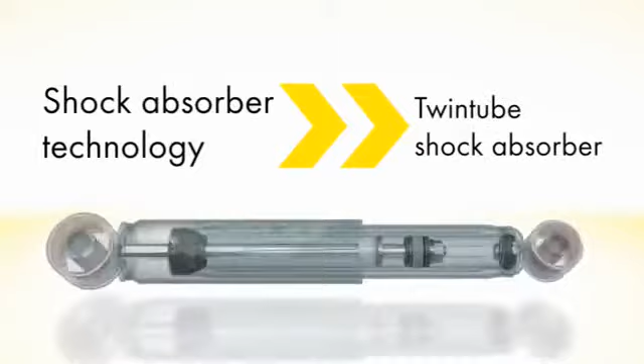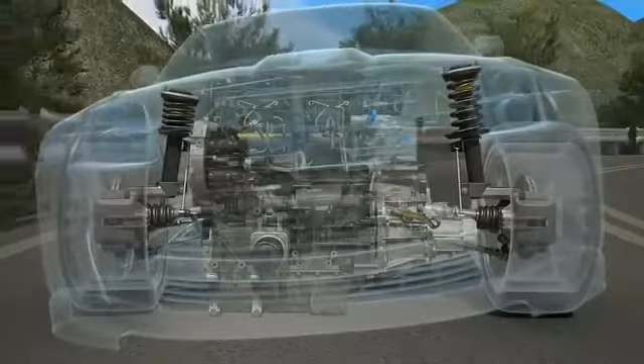The shock absorber is one of the fundamental elements of the vehicle's suspension system. Its function is to stop spring oscillations, providing control, grip, stability and comfort to the occupants of the vehicle.

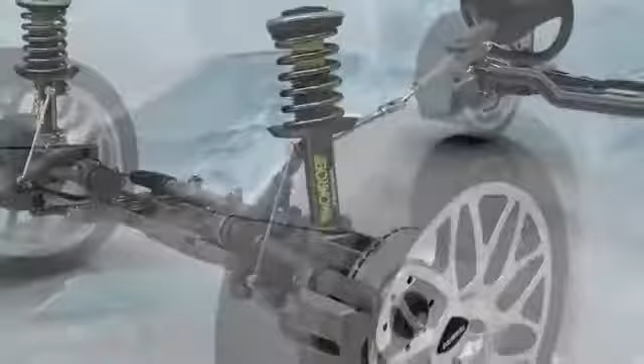Shock absorbers today are hydraulic devices, i.e., they work on the basis of oil flowing through valves, the damping rate of which is sensitive to the speed of the piston. Therefore, the faster it moves, the more resistant the shock absorber is to movement, thus becoming more rigid.

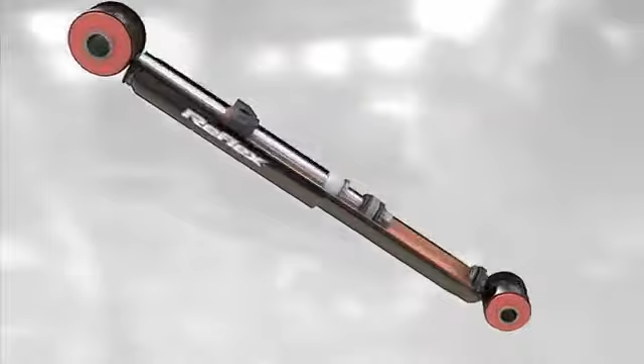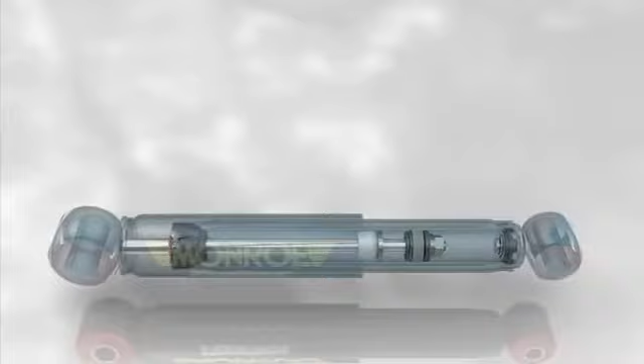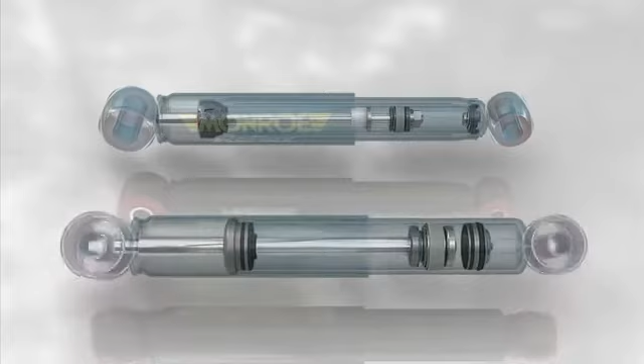The most common type of shock absorber currently used in motor vehicles is the hydraulic telescopic type. Although there are other variants on the market, most units are built with 1 or 2 cylindrical steel tubes with a rod moving up and down inside, which is attached to the vehicle.

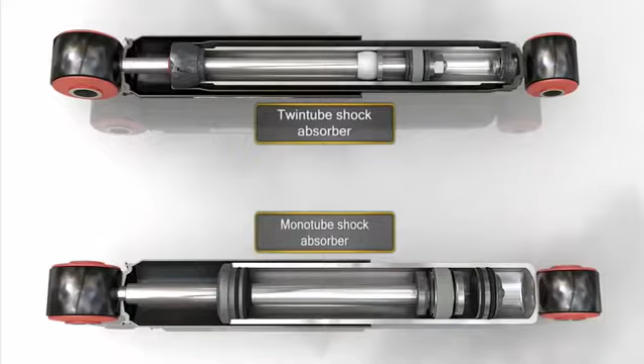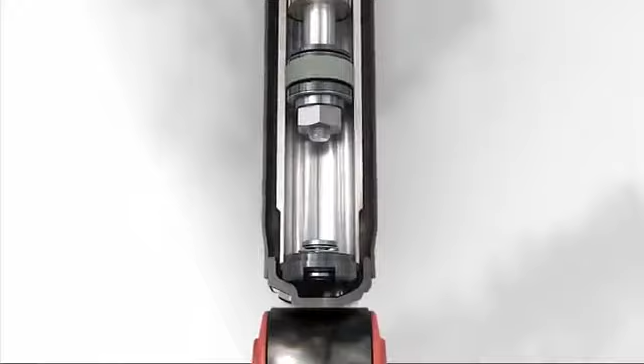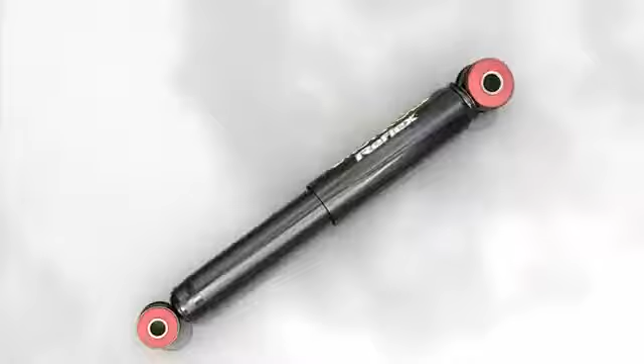The system includes calibrated valves that allow compression and rebound forces to be adjusted by controlling the oil flow through them in different driving situations. Twin-tube shock absorbers, as the name suggests, have a body made of 2 concentric tubes. These tubes create the working chamber and the reserve chamber.

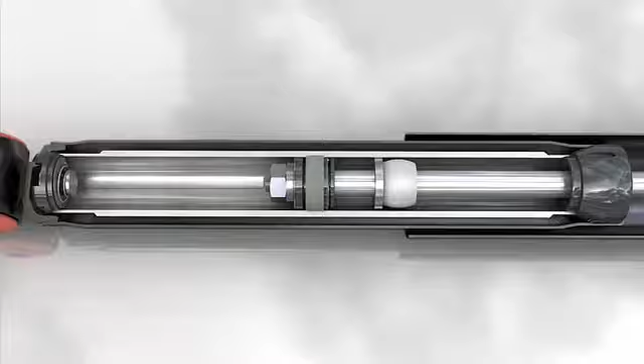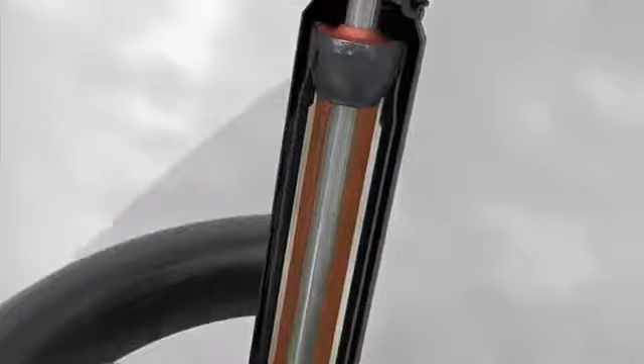For the shock absorber to perform its function properly, the working chamber must be full of oil at all times. Otherwise, the valves will be operating in air, causing them to malfunction. The reserve chamber will always be partially full of oil because its function is to ensure that the working chamber fills with oil, regardless of how compressed the shock absorber is.

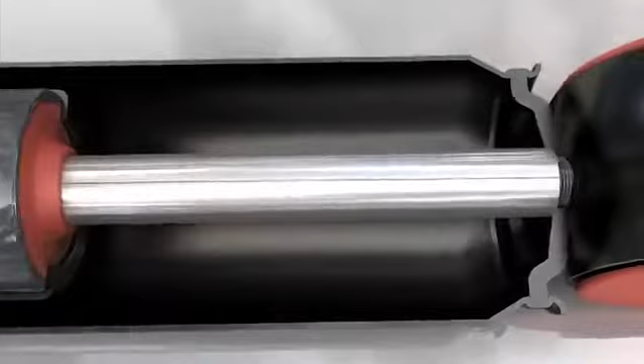Both tubes are separated, and a compression valve is located at the base of the working chamber tube. The standard design of any twin-tube shock absorber also includes a piston rod with a piston valve moving up and down inside an oil-filled cylinder known as the working chamber.

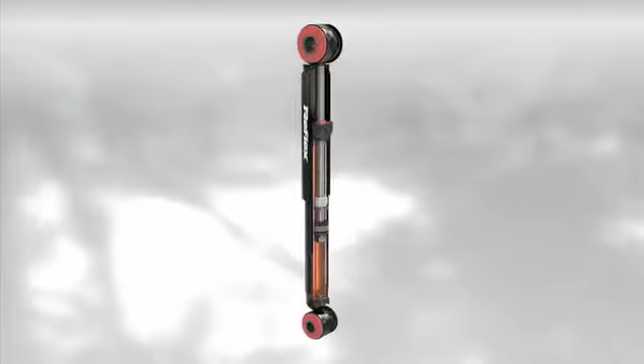This rebound valve comprises 3 types of basic elements that control oil flow. Flexible discs with the bleed perforations required to control force at low piston speed, 0.12 meters per second. The set of flexible discs necessary to control force at medium speed, 0.42 meters per second. And a perforated central cylinder or interface which manages the force when the rod moves at high speed, 0.76 meters per second.

In twin-tube shock absorbers, we also find a compression valve at the base of the working chamber tube. The configuration of this valve is similar to the piston valve, but inverted. It is also smaller in size because its design takes into account the damping force provided by the coil springs during compression and other elastic elements of the suspension system.

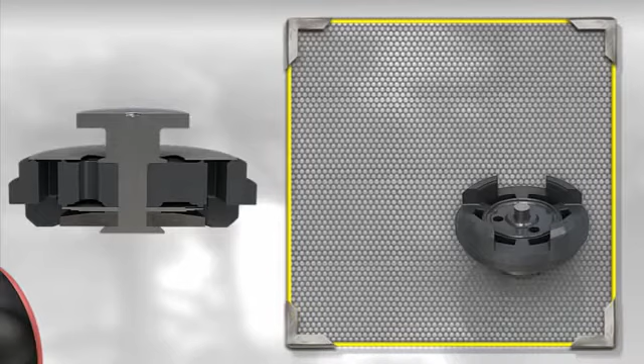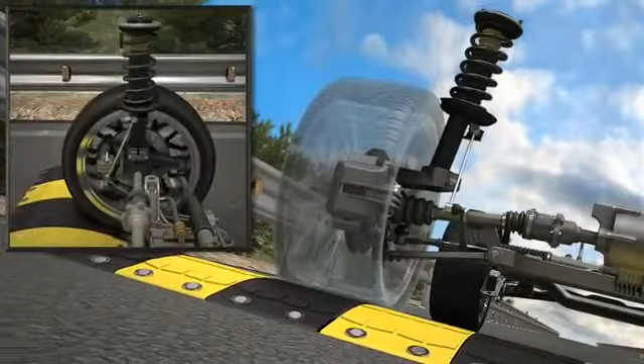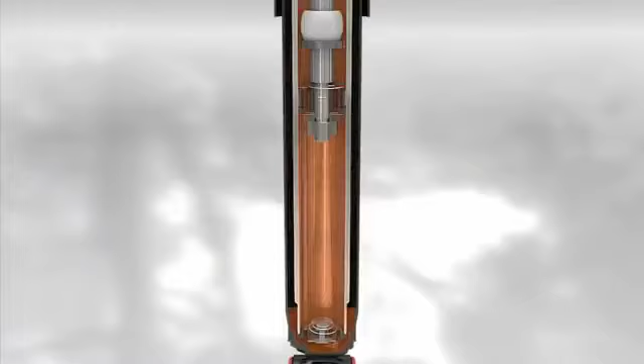When the shock absorber compresses due to uneven ground, the rod enters the working chamber, increasing the pressure of the oil contained internally. During this so-called compression phase, the compression valve controls the resistance of the damper movement, while oil flows almost freely from the bottom of the working chamber to the top through the piston valve. Increased oil pressure in the working chamber causes the compression valve to progressively open, and the excess oil to flow into the reserve tube in a controlled manner.

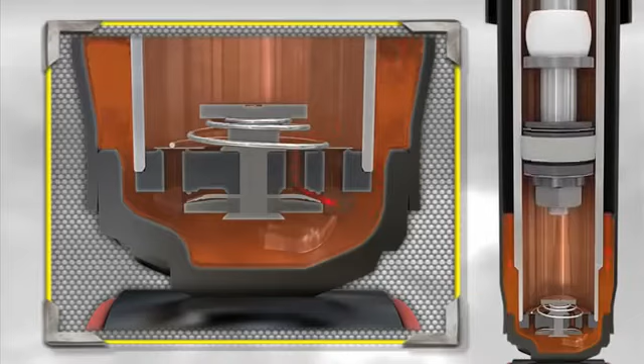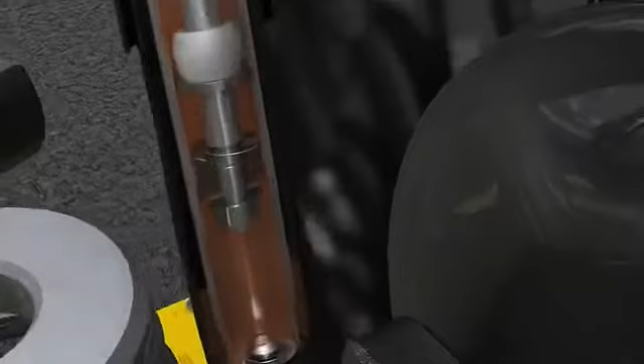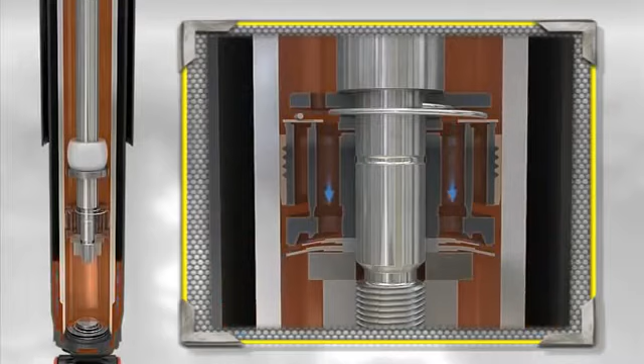During the rebound movement, the piston rod leaves the working chamber in a controlled manner due to the effect of the rebound valve. This movement creates a vacuum, which causes oil suction from the reserve chamber, which is equivalent to the volume of the piston rod having left the working chamber during the rebound movement. Thanks to this effect, the working chamber is constantly full of oil.

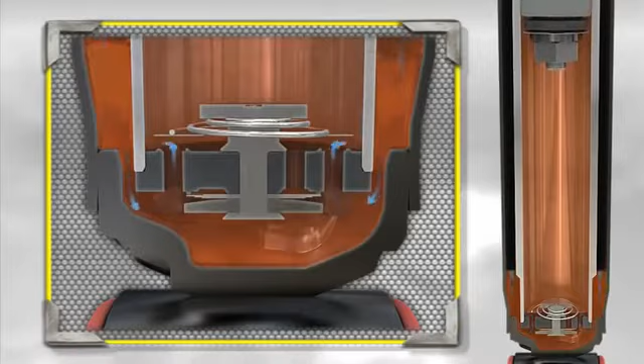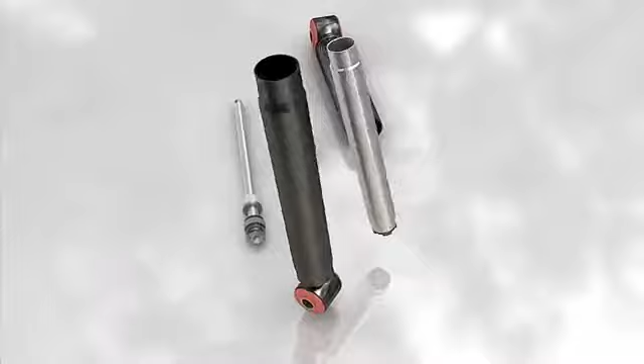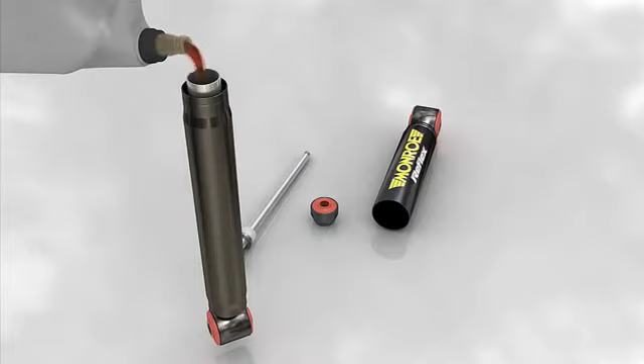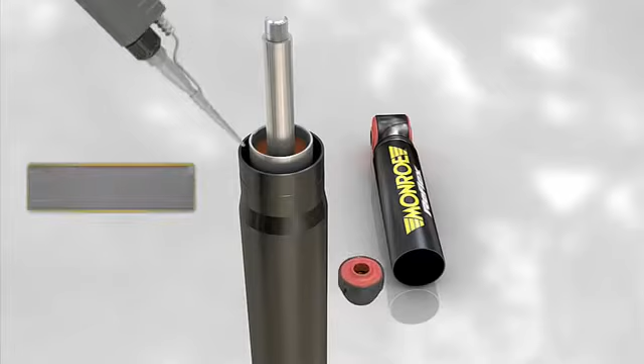In twin-tube shock absorbers, when the reserve chamber ambient air is replaced with compressed nitrogen at low pressure, 2.5 to 8 kilograms per square centimetre, these are called gas-charged shock absorbers, or more correctly, gas twin tubes. This gas charging process is carried out during the manufacturing process. Liquid nitrogen is added to the storage chamber prior to fitment of the oil seals, located at the top of the shock absorber, to prevent leakage.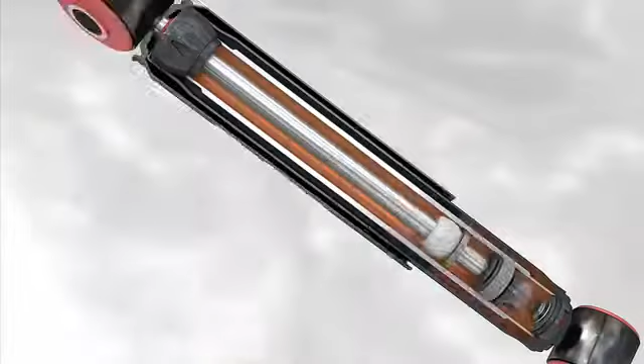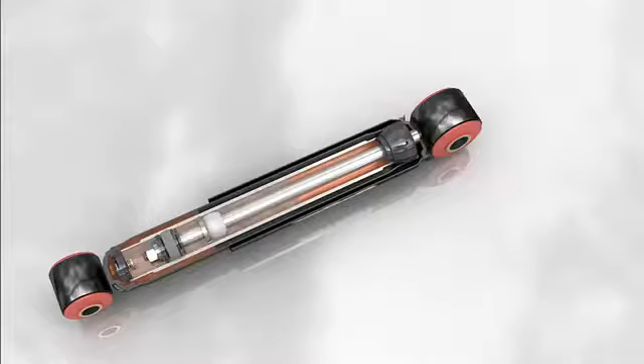The key advantage obtained by adding pressurized gas to the twin-tube shock absorber is that it avoids the phenomenon known as hydraulic fluid aeration or foaming, which appears when air bubbles form in the oil due to excessive pressure changes occurring when the oil flows through the piston valve as it moves up and down at high speed. Aeration causes noise and inconsistent shock absorber performance due to the air flowing through the valves.

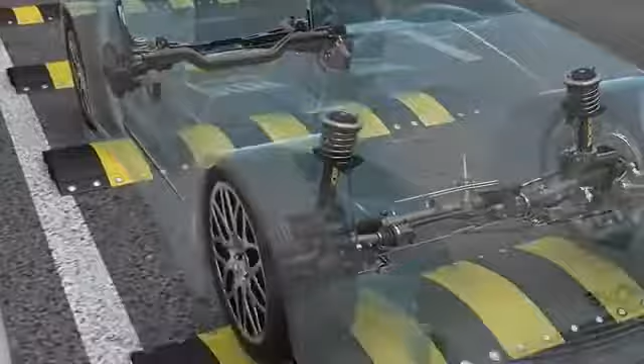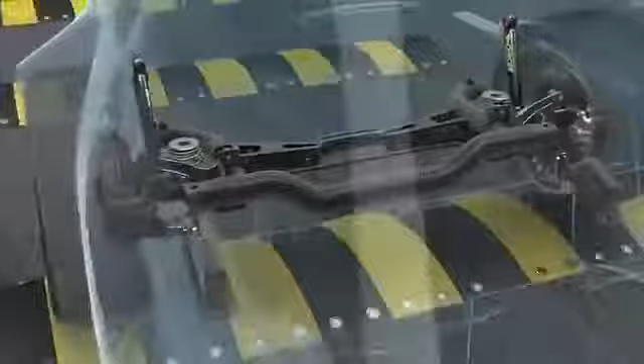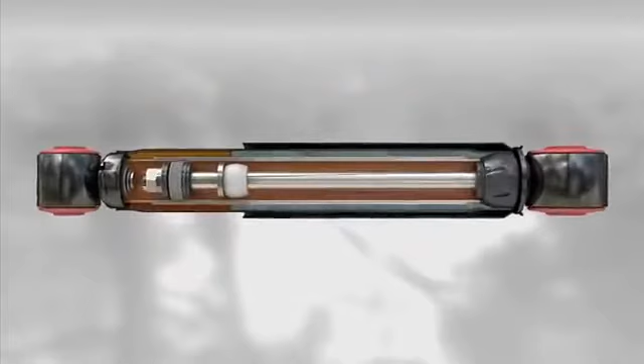In the case of the gas twin-tube shock absorber, the low-pressure compressed nitrogen gas prevents the formation of air bubbles, which produce the aeration problem and also their negative consequences for vehicle safety. Gas-charged shock absorbers offer other significant advantages over hydraulic oil shock absorbers. The pressurized gas in the reserve chamber pushes the oil into the working chamber, keeping it constantly full. This effect eliminates the need to prime the shock absorber before fitting.

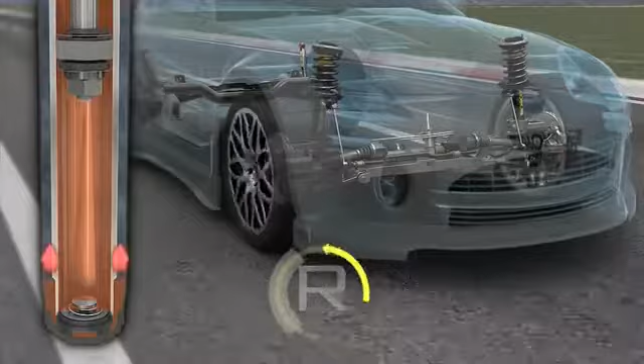Filling with gas creates a reinforcing effect in the shock absorber, which enhances the spring rate of the vehicle. When the shock absorber is compressed, the rising oil from the working chamber enters into the reserve chamber, compressing the gas housed in it. When the shock absorber begins to rebound, the force of the expanding gas helps the shock absorber to rebound more quickly. As a result, the shock absorber responds quicker, helping to keep tyre contact with the ground for longer, increasing the safety of the vehicle due to better tyre grip and more effective steering.